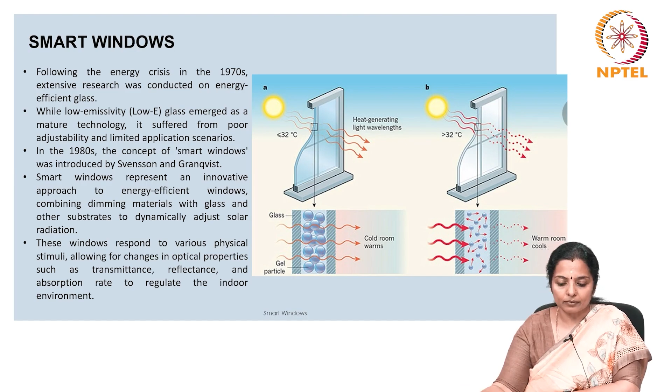Past investigations into smart windows encompassed diverse technologies including thermochromic, electrochromic, gasochromic, mechanochromic, photochromic and humidity chromic windows. This evolution reflects a continuous pursuit of advanced window technologies that offer enhanced adaptability and efficiency for diverse environmental conditions. Now, there are different types of smart windows.

Thermochromic windows. These energy efficient windows are a type of smart windows that can regulate indoor solar irradiation by tinting the windows, that is, by dynamically and reversibly tuning the transmittance or reflectance of ultraviolet, visible and near infrared solar radiation.

Then we have the electrochromic window. Electrochromic windows are energy efficient glazing solutions. They are relatively simple to build and operate. Chromogenic materials allow reversibly controlling the optical properties, which is refractive index and extinction coefficient of windows, upon application of an electric potential. So, when the power is off and the power is switched on, the way the materials align themselves changes.

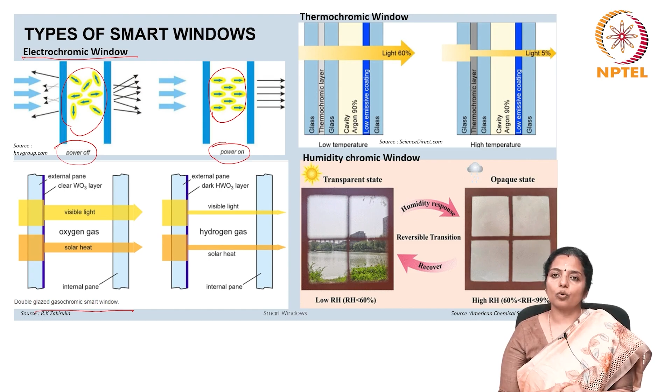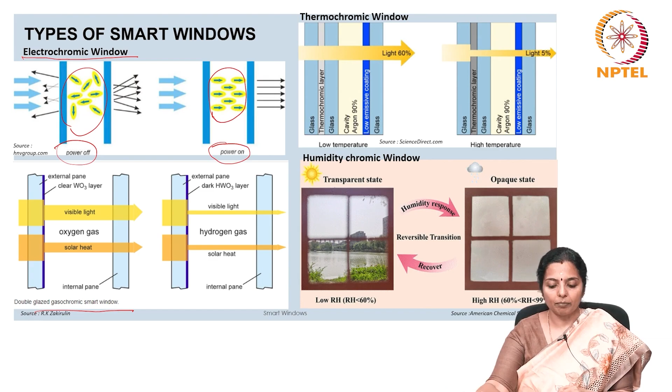And then there are the humidity chromic windows. Humidity chromic windows are activated by changes in ambient humidity, resulting in the variation of optical properties. Let us now look at the categories of smart windows.

Intelligent glass is categorized into two main types based on its mode of operation: passive control, which is self-regulating, and active control, which is adjustable to the user's specific needs. What are passive dynamic systems?

Passive dynamic systems operate without the need for an electrical stimulus. They autonomously respond to natural stimuli like light, for example, photochromic glass, or heat, for example, thermochromic and thermotropic glazing. In contrast to active systems, they are simpler to install and more dependable as they do not rely on user-controlled requests. What are active dynamic systems?

The active dynamic systems, either directly controlled or linked to a building management system, respond to external and internal climatic conditions, enabling the adjustment of visible and infrared radiation penetration without screening systems. This reduces energy consumption for air conditioning and lighting by over 20%. Advanced systems integrate with photovoltaic systems, ensuring complete electrical self-sufficiency.

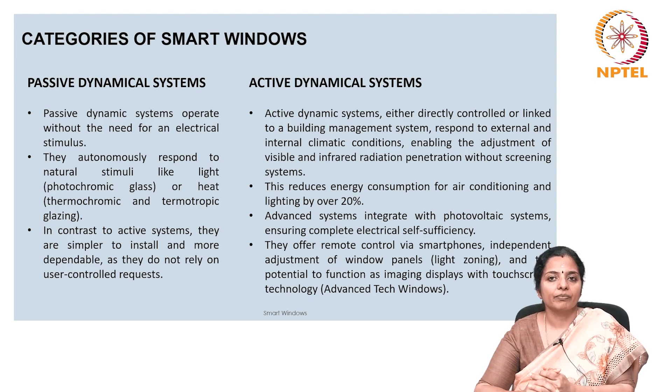They offer remote control via smartphones, independent adjustment of window panels through light zoning, and the potential to function as imaging displays with touch screen technology, which is an advanced tech window. Let us look at passive dynamic systems with photochromic glass windows.

Photochromic glass autonomously adjusts its transparency based on incident light intensity. This capability is attributed to organic or inorganic compounds acting as optical sensitizers in the glass paste. These compounds, like metal halides, silver chloride and silver bromide, or plastics, react to ultraviolet light or absorb solar energy, leading to a reversible and intense coloration process when exposed to sunlight.

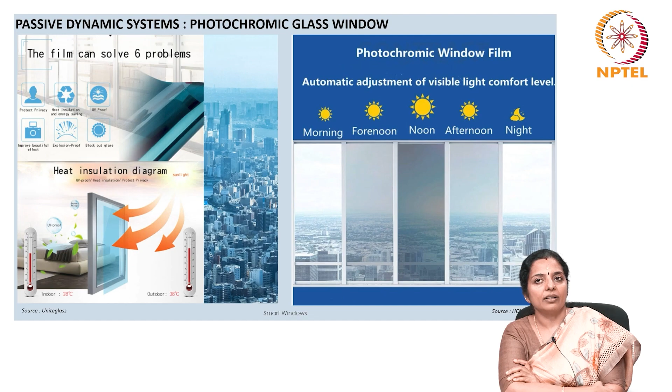The response time to environmental changes is typically a few minutes, with the transition from tinted to clear taking twice as long. However, variations in response time may pose challenges during sudden brightness changes or cast shadows, resulting in uneven light distribution. After the color transition, photochromic glasses become absorbent, potentially causing slab overheating and thermal shock rupture under intense solar radiation.

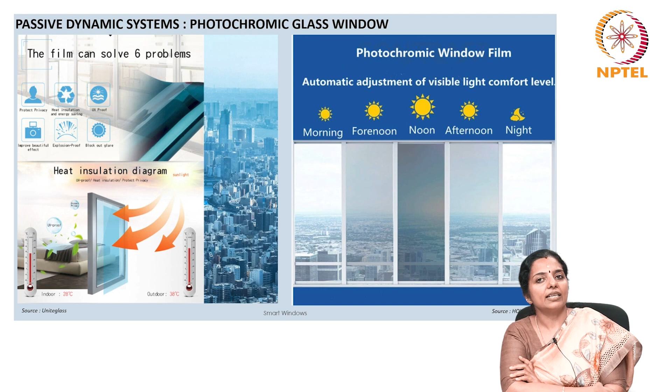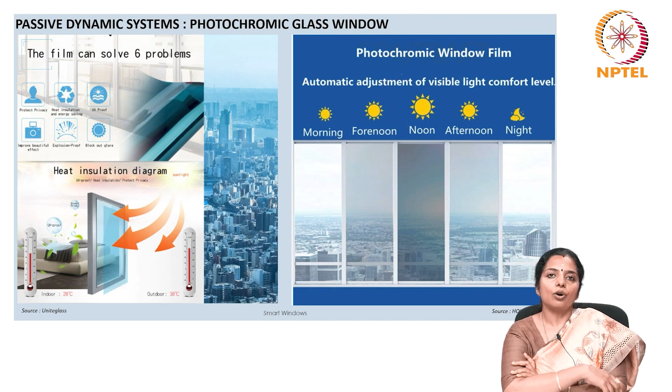Presently, these glasses find primary use in optical and automotive industries due to challenges such as high cost, technological complexity, lack of direct user control, difficulty in uniform distribution of photochromic substances in the slab, and gradual loss of reversibility over time. Despite these hurdles, technological advancements in recent years have mitigated some issues, enabling larger slab sizes and improved long-term stability.

What are thermochromic glass windows? Thermochromic glazing autonomously adjusts its optical characteristics based on the external surface temperature, undergoing a chemical reaction or phase transition between transparent and opaque states. This transition occurs within a temperature range, typically spanning 10 degrees centigrade for maximum transparency and 65 degrees centigrade for minimum transparency. Any temperature in between will lead to that specific transparency or opacity of the window.

Thermochromic properties are exhibited in various organic and inorganic compounds, including metal oxide films like vanadium dioxide, which shifts from a semiconductor to a metallic state, resulting in highly sensitive reflective behavior in the infrared zone. The most promising technological solution for implementing thermochromic glazing involves incorporating thermochromic materials directly into a 1.2 mm polyvinyl butyral plastic film, a PVB plastic film, which was introduced in the market in 2010.

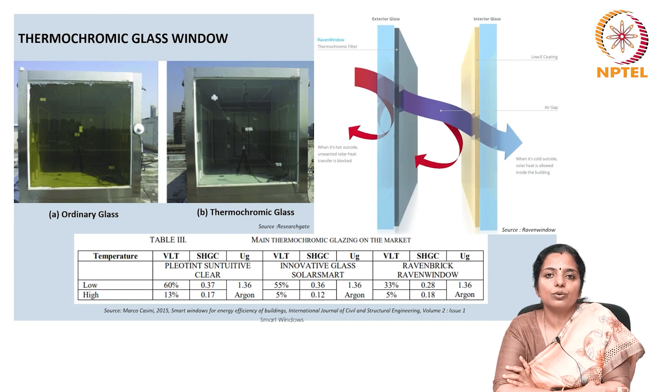Despite the inability of user control, thermochromic glazing offers advantages such as operational durability exceeding 20 years and cost effectiveness compared to active control dynamic systems, with payback periods of less than 4 years.

Let us now see electrochromic glazing, which utilizes specific materials to alter the transmission, reflection and absorption of solar radiation through an adjustable electrical stimulus. This change is induced by the addition or extraction of mobile ions from the electrochromic layer, altering the material's color when an electric field is activated. The core of an electrochromic device consists of an ion conductor sandwiched between two layers, an electrochromic film or electrode and an accumulation layer, which is the counter electrode.

Light transmission varies from 60% in the transparent state to 1% when opaque, and the solar heat gain coefficient ranges between 0.46 and 0.06. The energy required for coloration switching is minimal, and electrochromic materials possess a bistable configuration requiring even less energy to maintain the tinted state. Although the device exhibits uniform properties over its surface, the darkening process is gradual, taking seconds to minutes depending on panel size and glass temperature. The gradual change of light transmission provides occupants with a natural adaptation to varying light levels without discomfort or distraction.

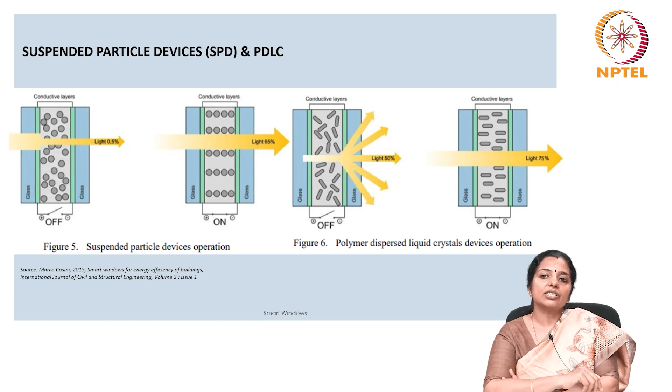Liquid crystal glazing is mainly used for partitions requiring privacy and is not bistable, requiring a constantly applied electric field and consuming about 5 to 10 watts per meter square. PDLC devices are commonly used for interior or exterior partitions, offering applications such as shop windows, meeting rooms, bathrooms, etc.

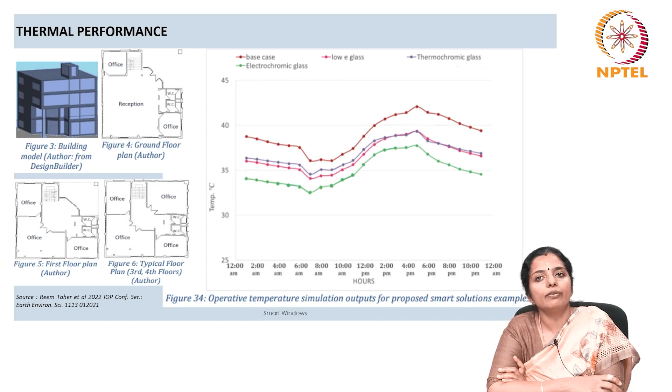Different types of smart glass retrofitting exhibit varying impacts, with electrochromic glazing standing out for achieving the most significant thermal improvement, reducing operative temperatures by approximately 3 to 7 degrees centigrade. In contrast, thermochromic glazing shows the lowest thermal performance with a reduction of about 2 to 5 degrees centigrade.

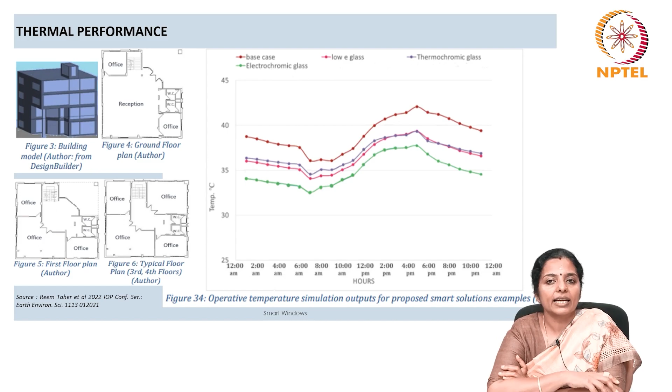Energy analysis indicates that incorporating split air conditioning units alongside the proposed smart glass solutions leads to cooling energy consumption reductions ranging from 21 to 36.4% depending on the smart glass solution type simulated. Thermochromic glazing demonstrates the most substantial energy savings at approximately 36.4%. Despite electrochromic glazing's superior thermal performance, it still achieves a noteworthy 21% reduction in energy consumption, recognizing its reliance on electricity.

From the analytical comparison of the outputs of simulating the building with the proposed smart solution and split air conditioning units, smart envelopes can reduce the energy consumption for cooling by about 21 to 36.4% depending on the solution type.

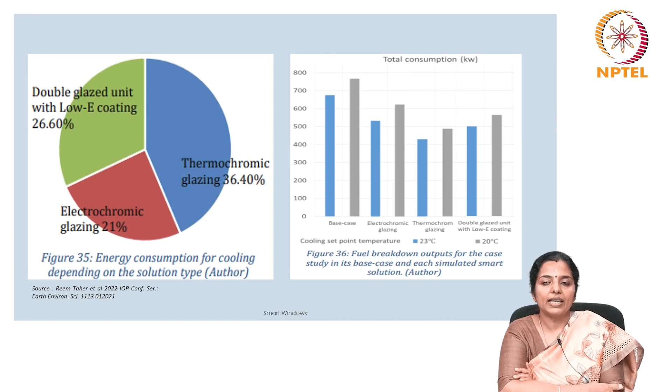Figure 36 summarizes the total fuel breakdown outputs for the case study in its base case compared to each simulated smart solution when the air conditioning unit set point temperature is set at 20 or 23 degrees centigrade. Energy consumption is reduced by about 12.5% to 14.5% when the set point temperature of the split unit is changed from 20 to 23 degrees centigrade.

From all these studies, it can be concluded that smart windows, which are nothing but windows which use smart building materials along with some smart technologies, definitely help in sustainable architecture.